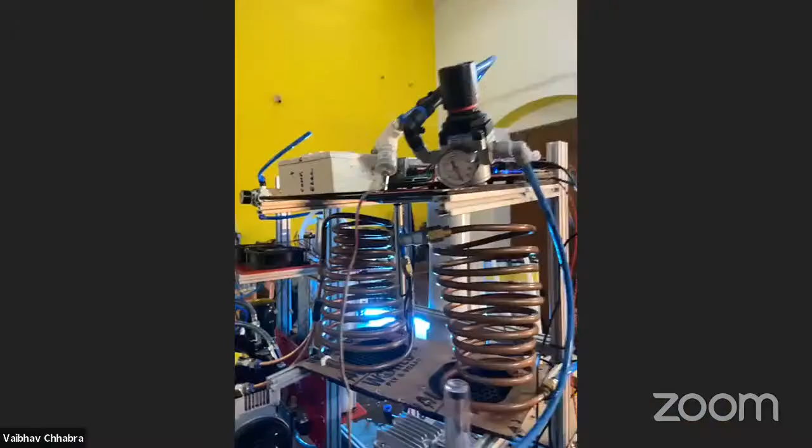And then from there, we get into a pressure regulator where we're able to regulate how much air is going in and out. And you have an oxygen sensor to measure out the exact amount of oxygen that you're getting out. So that's pretty much all of the system. Goes into the flow meter? Yes.

This part goes into the flow meter that you can see over here, where you can actually see exactly how much LPM is the flow. Obviously, right now the system is off. Anything that you want to add?

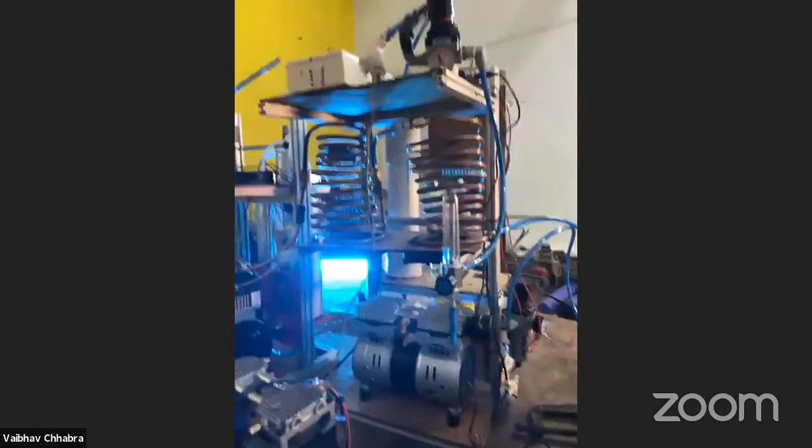Yeah, so the key to the whole system is the zeolite. Zeolites have the property where they adsorb certain gases and don't adsorb certain gases. And the adsorption is more of a physical process that requires some pressure. There are different versions of zeolite, but you can use things like sodium 13X, or you can use lithium X, for example.

When you pass air, which is roughly 80% nitrogen and 20% oxygen, through a chamber consisting of zeolite, the nitrogen sticks to the granules of the zeolite, whereas the oxygen passes through. And that's the basis of the whole pressure swing adsorption process. So you have zeolite, you pressurize it, and nitrogen sticks to the zeolite.

The oxygen passes through, you collect that oxygen as an outlet, and the nitrogen that is stuck in the zeolite, you push it back out through a reverse pressure. So that is more or less the heart of the pressure swing adsorption technique. It's not new, it's a fairly old technique, it's been around for quite a long time. So that's the heart of the whole system.

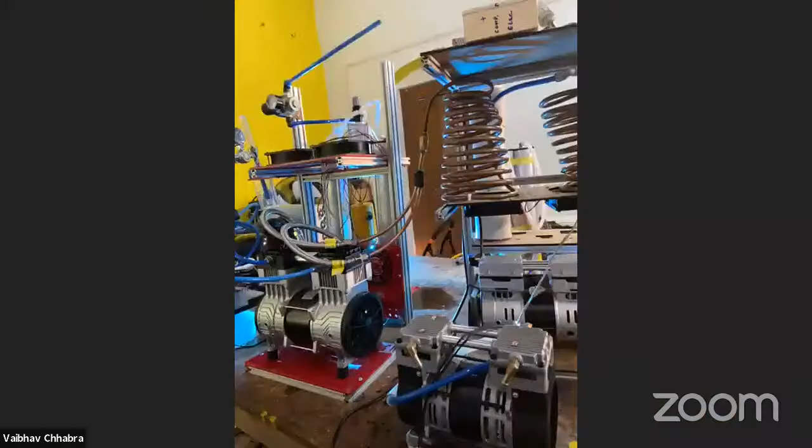And then there are a couple of other important things that you need to take care of. Things like the pressure at which you're inputting air to the system, how many liters per minute of air you're putting in, and your output directly depends on that. So the more input you have, the more output you get. Ambient temperature plays a big part in your system's performance. Ambient humidity is equally important.

So the last 45 days, these are the challenges that we've been tackling, trying to figure out what affects the system, what makes it better, what makes it worse, and so on. And based on that, we built a couple of prototypes. The first one that we had, I think Vaibhav can show you. You can talk about that.

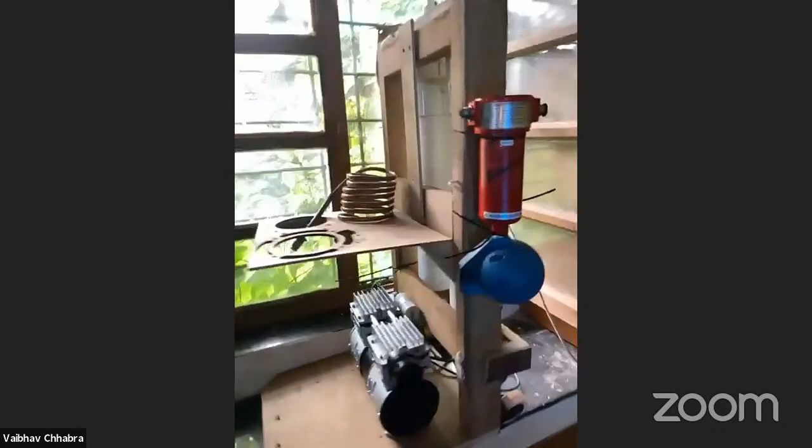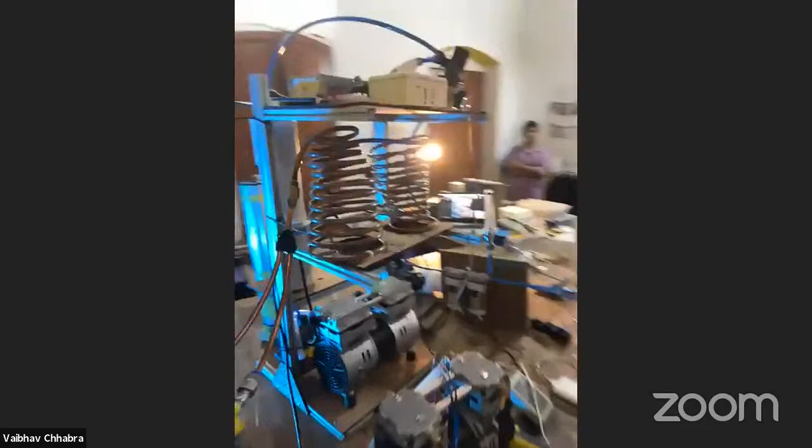And based on what we have learned with this system, there is version 3 that we have just finished. It still needs some wiring up and so on, but it's pretty much assembled at this moment. It just needs the electronics to go in, and we should be able to test it out within some time.

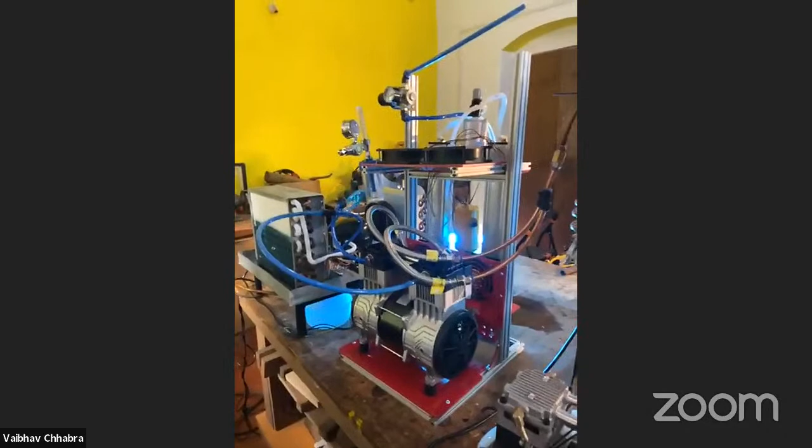Two of the biggest challenges we faced was how to get the required amount of oxygen at the high flow rate that was required. For COVID patients, you need anything up to 15 liters per minute at a concentration that is 93% plus or minus 2 or 3%. So nothing less than 90% is what your expectation is from the machine. And getting that is a bit tricky in many engineering ways.

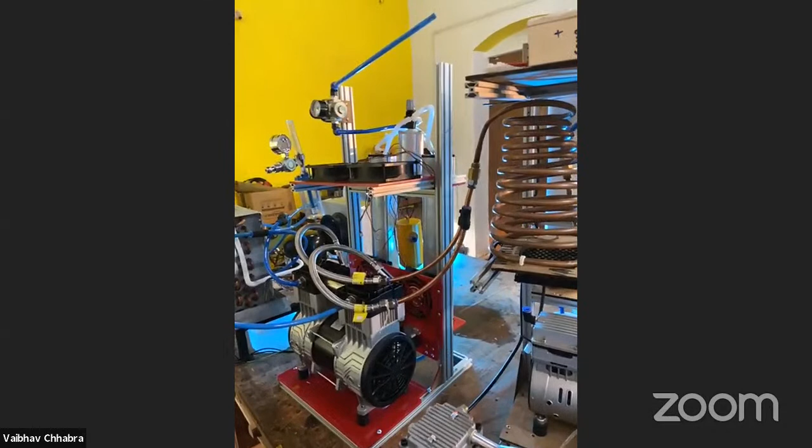So first off, when we did version 1, we were using a zeolite known as Sodium 13X. A lot of different labs have tried the same zeolite, and performance was a bit tricky in India with the high humidity we have. That's been a big killer for the zeolite. The trouble with humidity is zeolite absorbs moisture or water better than nitrogen. So after some time, the performance of the system really degrades quite a lot.

So most of the labs, some of the others who are here today will walk you through their trials about having worked with sodium 13X. But after about a month of trying out sodium, we came to the conclusion that we need a better zeolite. And our current choice is Lithium X. It's a much more efficient material. It is 3 times better than Sodium X, so we get better performance.

We can make a smaller system. It's more compact. And also some of the other elements that are required in the sodium system are not required in the lithium unit. So there is a kind of a cost balance in that as well. Want to show this? So yeah, quickly, this is what the current version 3 schematic looks like. It's quite simplified. There's really not a lot to it.

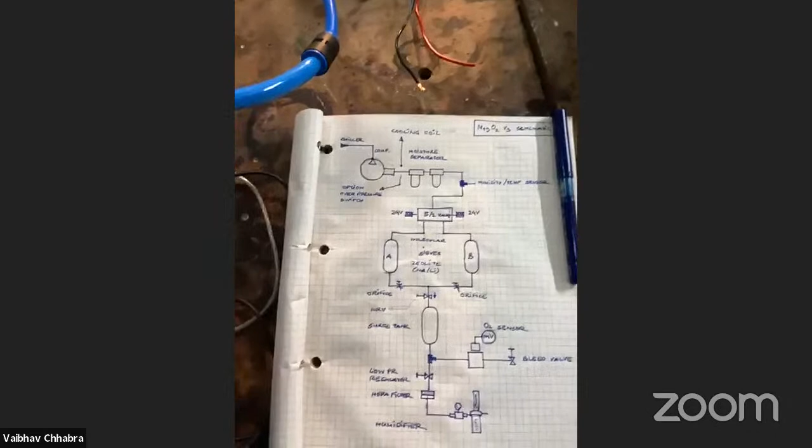So, pressurized sieve A. And while sieve A is being pressurized, sieve B is venting out to atmosphere whatever nitrogen it has collected. During that time, sieve A is collecting nitrogen into the zeolite, but allowing oxygen to pass through and come out through the orifices into the surge tank.

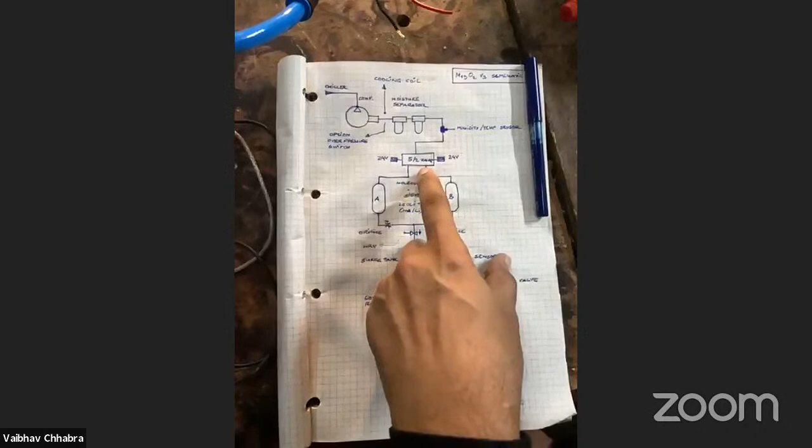And then after a certain amount of time, which is based on the timing cycle set in the electronics, you flip the thing over, and your sieve B starts charging with air, pushing oxygen out and holding nitrogen here. And sieve A starts releasing nitrogen that is captured in the previous cycle. And this cycle keeps going back and forth, swinging from sieve A to sieve B.

So the output of the 2 sieve tanks then goes through a valve into the surge tank, which is a buffer tank to even out the fluctuations in the output delivery. And from there is where you get your pure oxygen. We have a tap off to measure the oxygen through the sensor. We have a pressure regulator to set how much air pressure you get at the outlet.

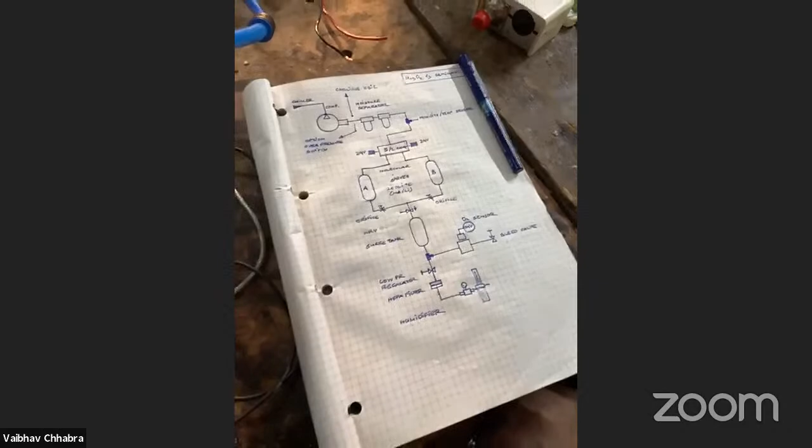You have a filter to make sure that the oxygen is filtered. And finally, there's a humidifier that makes sure that the oxygen output has some humidity, because you can't apply dry oxygen to patients, for example. Now let's see it in action. What we are doing next is turning on the compressor, so it's going to be a little loud, but here we go.

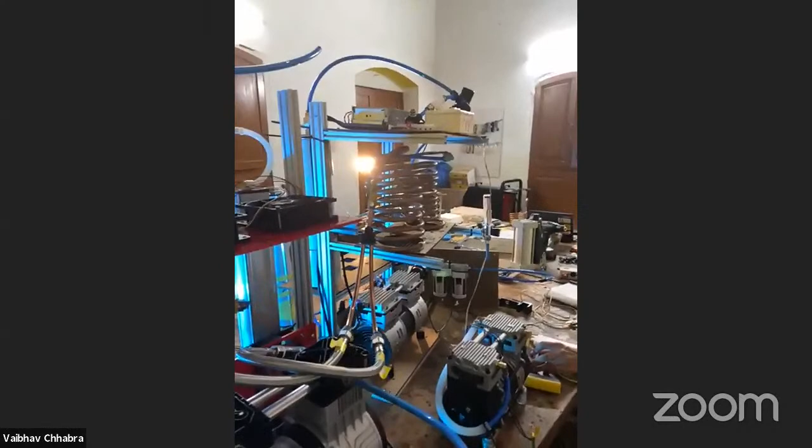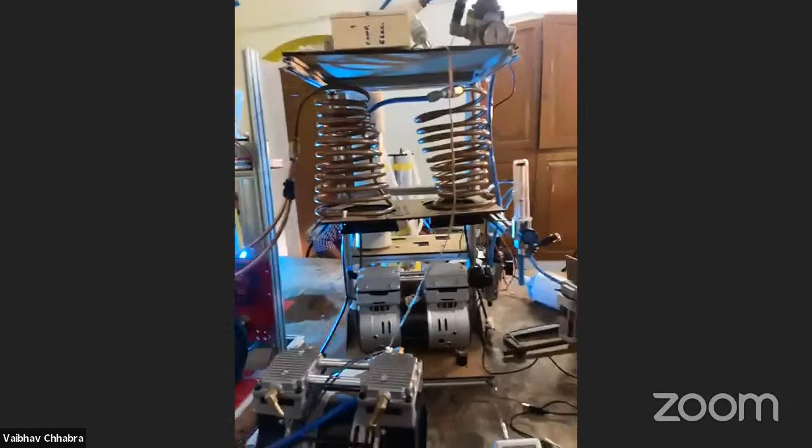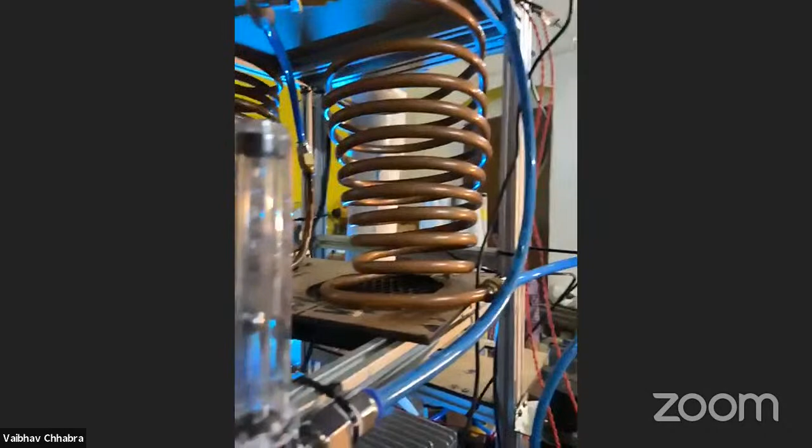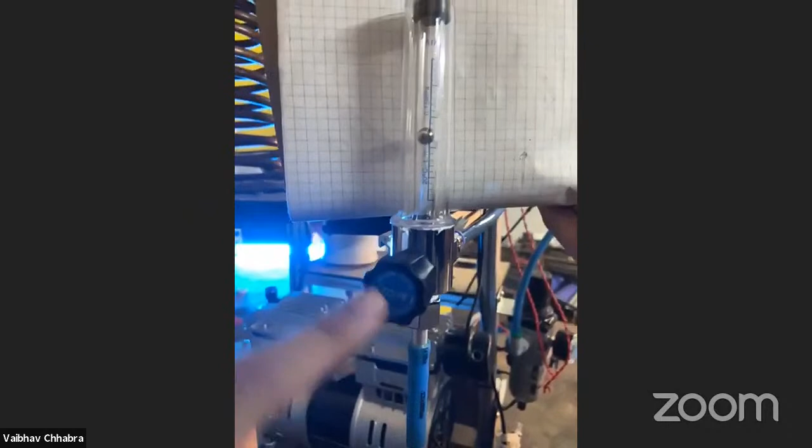At the flow, as you can see, rising. So currently, it's at about 15 LPM. 15 LPM over there. This is a float-based flow meter, so whatever you see, multiply that by 1.25. And then over here, what you see is the oxygen concentration, which gets ready. We will see it flying.

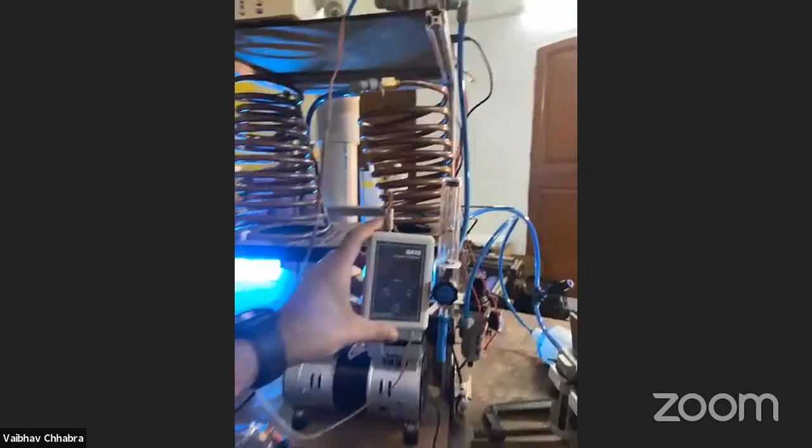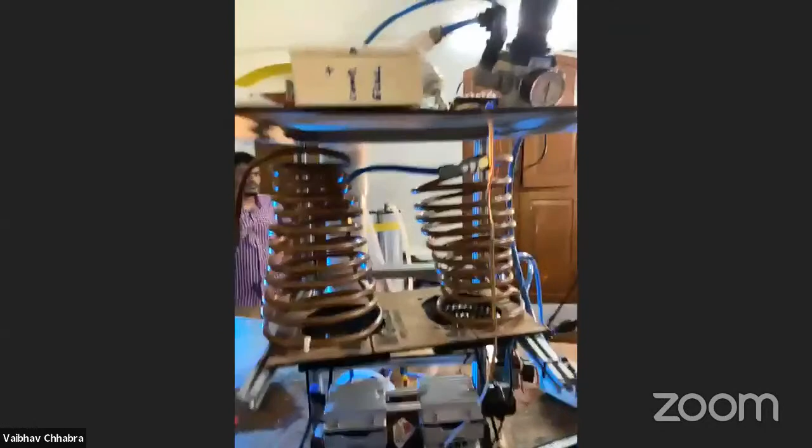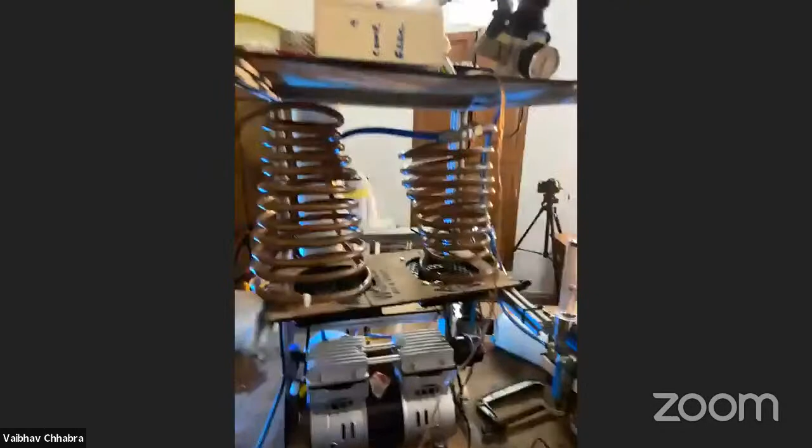Okay. Turning that off so we can speak a little bit more. First big problem is about the zeolite itself. Sodium versus lithium. So lithium absorbs about 22 ml per gram of nitrogen compared to sodium based, which only absorbs about 8.

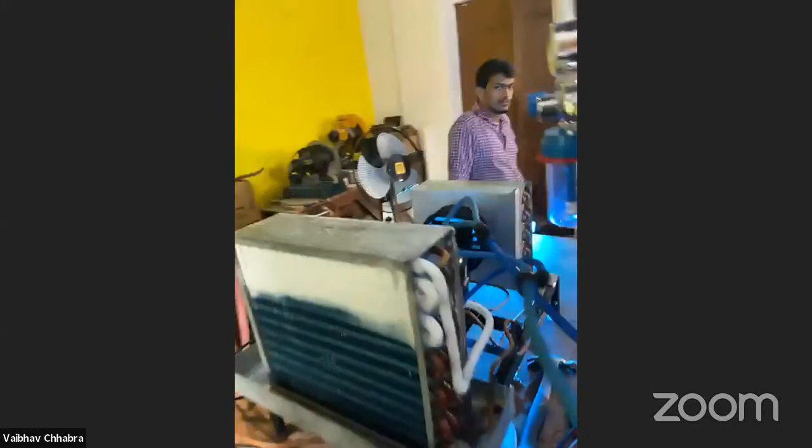Yeah. So one of the systems that we tried out to solve humidity was this one that we showed you. The next system that we're testing out that Gorbachev can talk a little bit more about is a chiller. So this over here is the chiller that we rigged up. So there's a compressor. That's the heat exchanger. And that's the chiller. So the output basically goes from here currently into our main system, directly into the big compressor, where the pipes can take it into our system.

Okay, I think that's pretty much it from our side. And now what we can do is let the other labs talk about their inputs.

Before we move ahead, I just want to talk about zeolite. I know Vaibhav showed you the zeolite box and everything. If you see the white granules, the fine particles, that is the size of zeolite you have to use. They are very small. If I can show you, this is the zeolite grain here. It is 0.7 mm. That is the fine zeolite granule that you need for generating oxygen.

There are 2 variants, as previously explained: sodium and lithium-based zeolite. With sodium, you need a larger volume for a particular liter per minute, and with lithium, you need a lower volume for a particular liter per minute. So lithium is the preferred one, but we went with sodium and we had results from the sodium zeolite. So I'll show you our current prototype.

So this is our first prototype. You can see sieve A over there, the surge tank in between, and then sieve B. And this is our desiccator, where we have activated alumina filled in, which does the job of reducing the humidity level in the air system. Making sure that your air is dry is very essential.

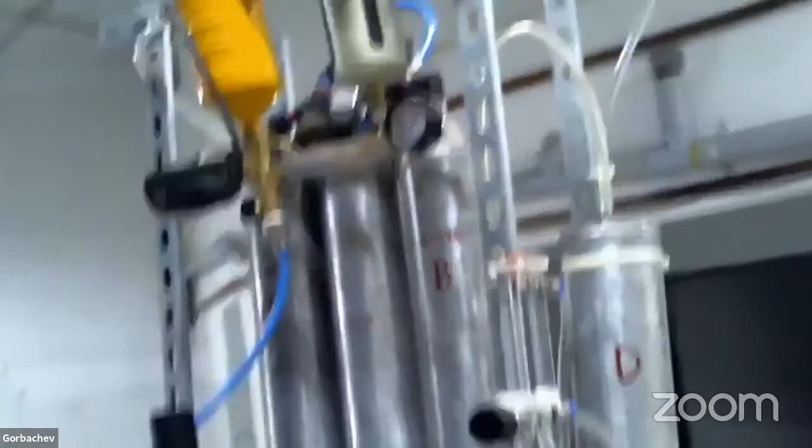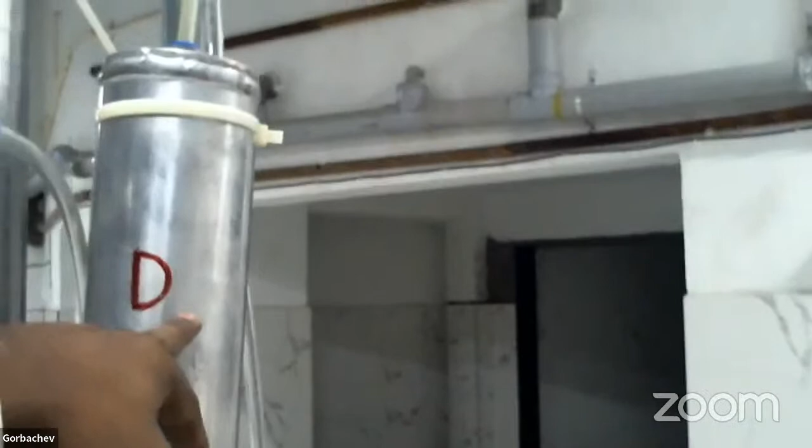If it is not, then instead of absorbing nitrogen, the sodium zeolite in these sieve beds will be absorbing water. That should not be happening. So you use a desiccant filled inside this chamber, which removes the moisture, and then the air is sent to the two sieve beds. Right now each has 1.5 kg of zeolite for around 12 to 14 liters per minute. If you want a higher liter per minute, you can increase the number of sieve beds or increase the

diameter of your chamber. This is the big radiator or condenser, whatever you want to call it, at the bottom there, which does the job of cooling the air coming out of the compressor. The air that comes out of the compressor is hot because of the piston head. So the water is kind of in a vapor state.

The condenser helps cool the vapor down into water form, so that it can be removed using a moisture separator. This is a moisture separator here. It has a solenoid valve, so once the moisture reaches a particular level, we can remove the moisture from the airline system. For medical air purposes, making sure the moisture is removed is very essential.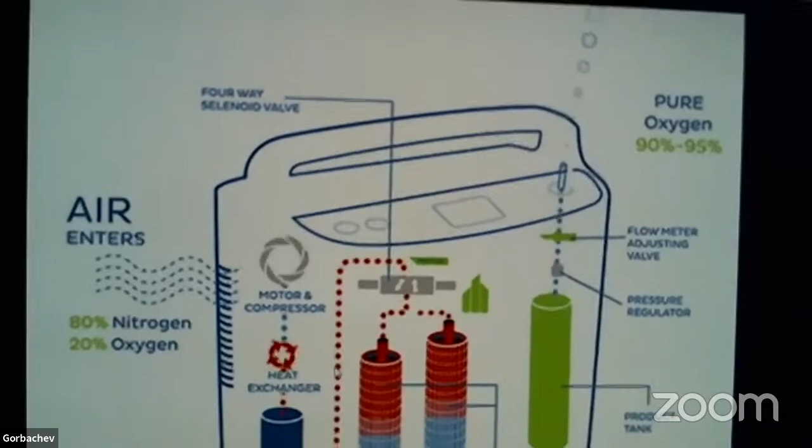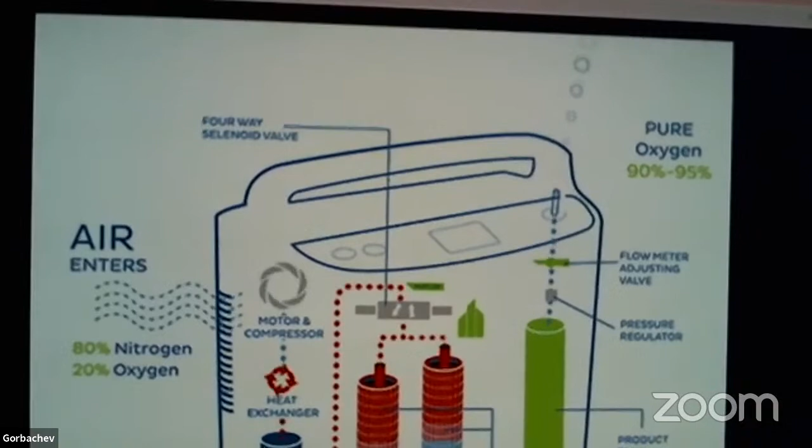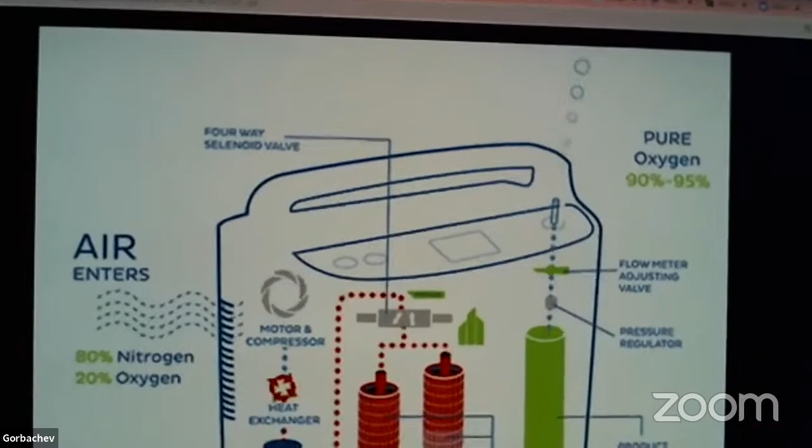But if you're in the coastal region, this will mostly fail, because the options to remove moisture or to further cool it down are not scaled or climatized to our Indian atmosphere. So that's what we are trying to fix. We know this part, how it works and everything else. What we are trying to fix is this heat exchanger part and optimizing it right now. So that is the challenge we have, and that's what we're working on.

I hope whatever I said made sense, and it helped you guys in whatever you want to do with it. Thank you. Thanks, Gorba.

I'm going to now call upon Vijay. So thank you so much, Gorba, for explaining how we were working on the sieves and the humidity issue.

There are multiple pieces of this concentrator that we all did not know about, but were able to really discover as to what is the real functionality of it, what needs to be broken down. There are a lot of questions coming up around certifications and all of that. We will be answering all of that at the end of the session. I do understand that everybody has curiosities about how we will get certified, et cetera.

But an interesting thing before Vijay goes into his presentation is that a lot of concentrators that are coming in are recreationally certified. So really, there's a question to ask overall when you're buying and donating these oxygen concentrators: what are we really doing?

But moving on, Vijay, like I mentioned earlier, is the CEO of Fracktal Works. He's the founder there. He's been part of the hardware ecosystem for a very long time. He's been building 3D printers in India for about 8 years now. And he was with us in Goa since the beginning of the restarting of the initiative. He spent 1 whole month almost with us, actually, before he went back to Bangalore.

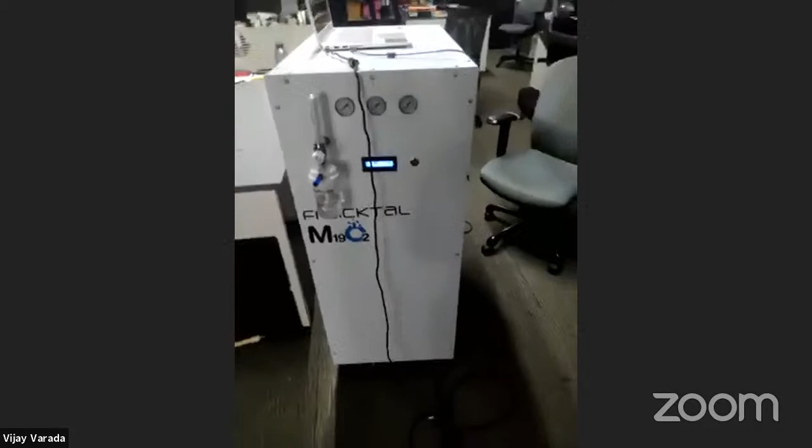So this is the oxygen concentrator that we've built. It's a little bigger, because this is based on the Sodium 13X. And because of that, everything had to be much larger than what the Maker Asylum team have shown. Let me see if I can switch to my front camera. Hold on. There you go. Much better. So right now I'm using it also as my table, just to show you the live demo afterwards.

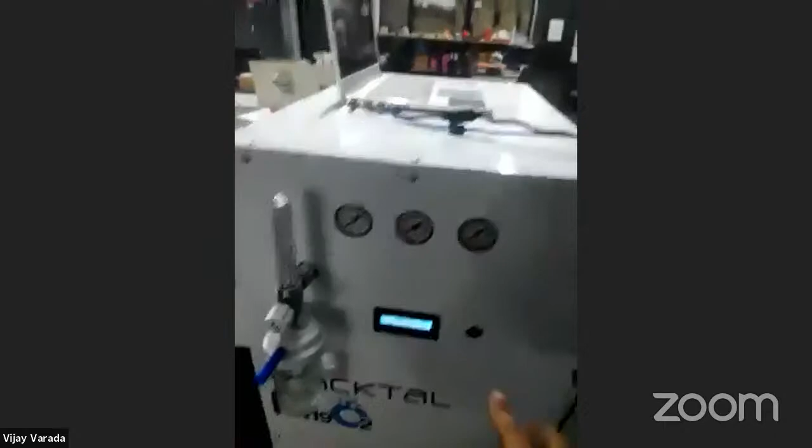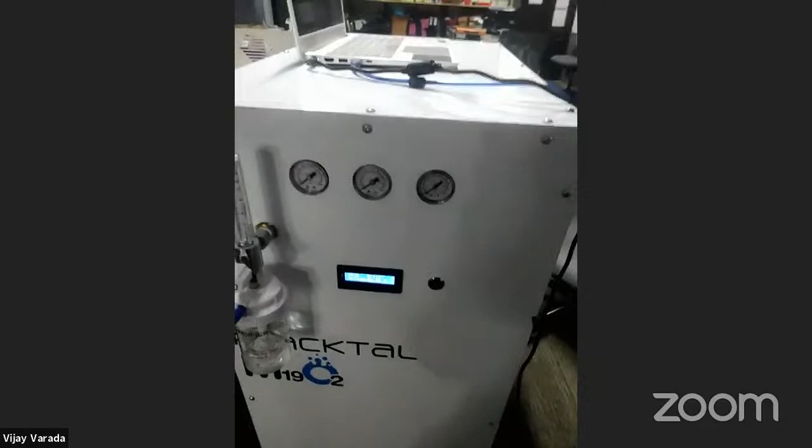So we have the display over here, which shows the oxygen percentage, all the critical pressures over here, and then we have the flow meter at the output. This button primarily starts the compressor. So you make sure that the electronics start before the compressor starts. I have the side open over here, so we have a 2.5 horsepower compressor, courtesy Maker Asylum for donating this for the time being.

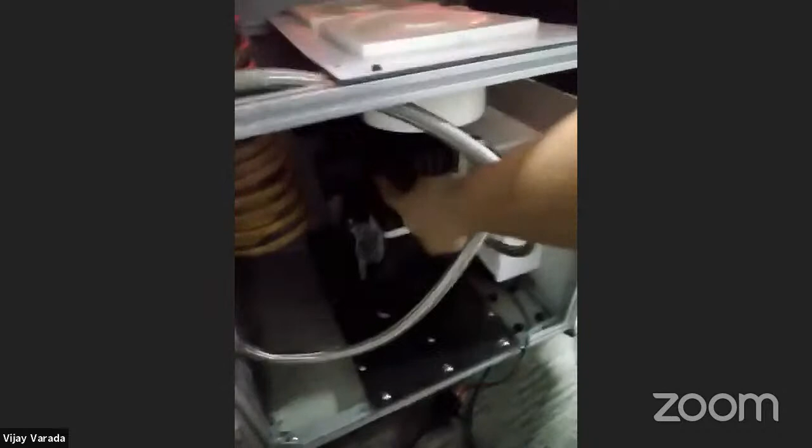This is what is required for getting about 15 to 20 liters per minute from a Sodium 13X system. Right now I'm using Sodium 13X, and like Anool had mentioned earlier, compared to lithium, it's 3 times less efficient than Lithium X. So to compensate for that, you had to have a much larger compressor.

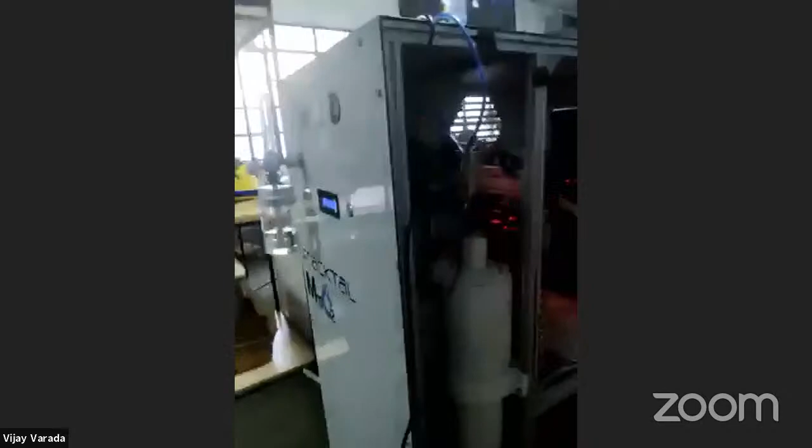And more or less, everybody's talked about the different parts. We have a much larger cooling coil. We have a moisture separator. More or less everything else is standard. We had to have all of these components on it to make sure that you get 15 liters per minute from a Sodium 13X system. So I'm going to turn it on now, and I will show you the output. Turning it on over here, it might increase in volume.

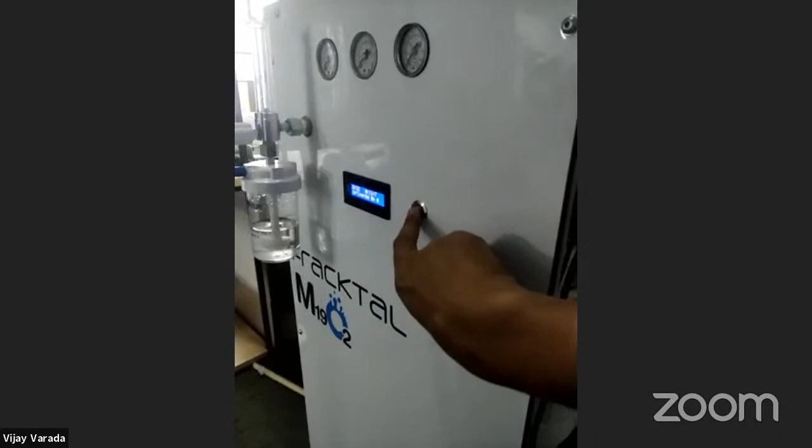So I'm going to switch over to my laptop now and show you LabVIEW, which we've been using to calibrate the timing parameters. Give me a minute. Hello, can you hear me? Okay, awesome. So the device is on right now. I'm going to share my screen. Could you let me share my screen so I can show them the LabVIEW display? You can now share your screen.

Okay, so a little backstory behind this. When we were at Maker Asylum, there were quite a lot of problems to deal with. We were dealing with a cyclone. We were dealing with power outages, in addition to figuring out the oxygen concentrator. And this was the first time we were making it, right? And there are a lot of things that change when you're changing your ambient temperature, the size of the zeolite, the kind of zeolite that you're using.

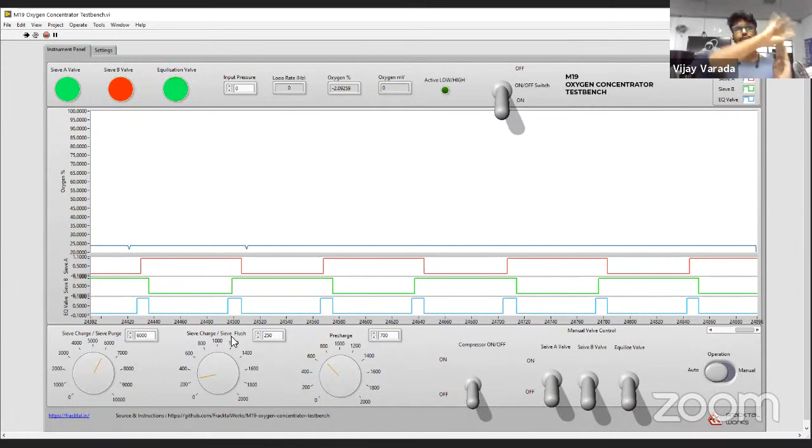So again, if you can see my screen, the three main timing parameters on an oxygen concentrator. You have your sieve charge and purge, where one sieve is generating oxygen and one is purging. You have your flush cycle, where all or most of the oxygen being generated from one is used to flush the other one and remove all the nitrogen. Then you have your pre-charge, where both the sieves are generating oxygen.

So these cycles are extremely critical to figure out and fine tune, because ultimately this is what gets your high level of oxygen purity, as well as makes sure that your zeolite lasts for a long time. Otherwise your zeolite gets saturated with nitrogen and it's very difficult to get started again.

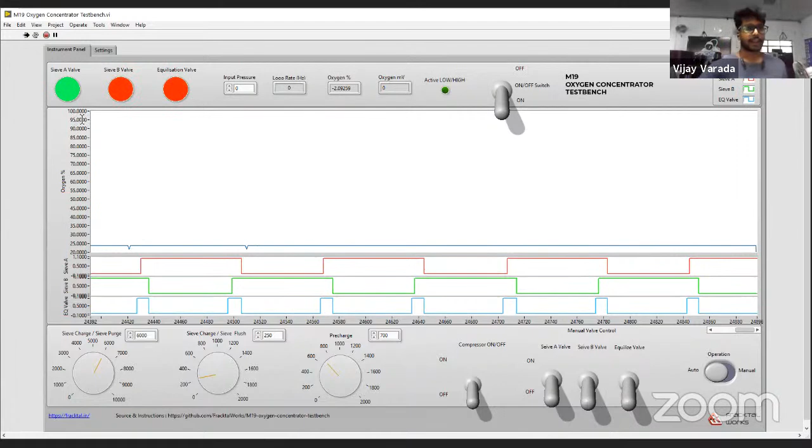So I will start up my system. I have it connected to the machine right now. I will turn it on. Okay.

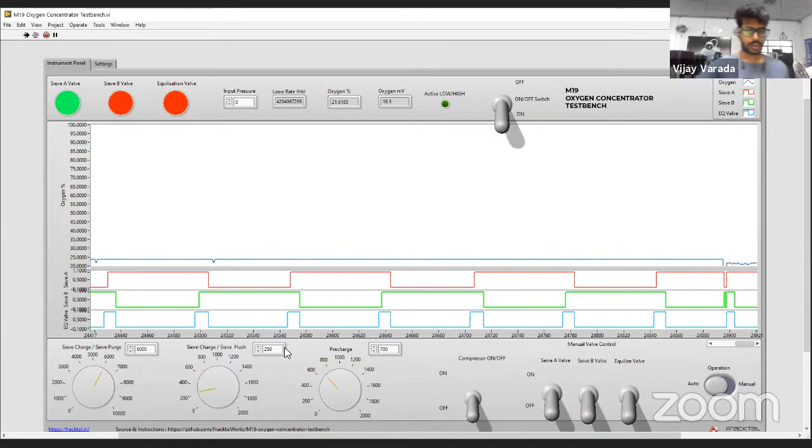Okay, awesome. So now basically the compressor is off, so it's showing me the oxygen value at ambient. All of this can be calibrated from the settings. What it's showing me is the timing cycles for my sieves A, B, and equalization, and I can change this on the fly over here, and it's giving me the oxygen value.

So I will turn on the machine now, and then you will see how the oxygen will start increasing. Slowly the oxygen is increasing over here. You can see right here. I'm also correspondingly showing the millivolt value.

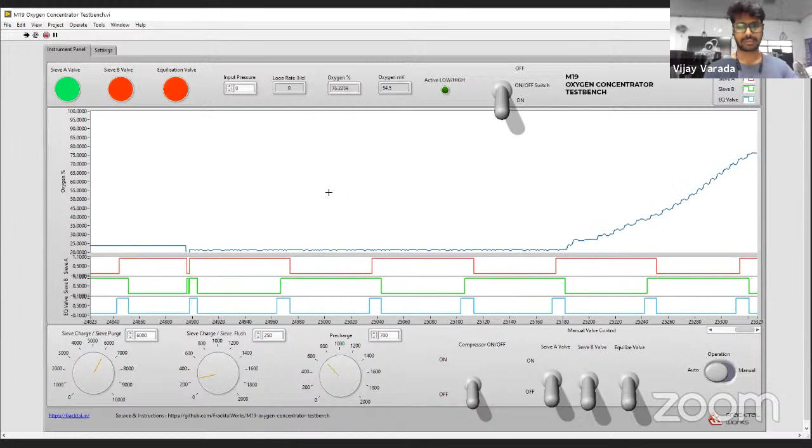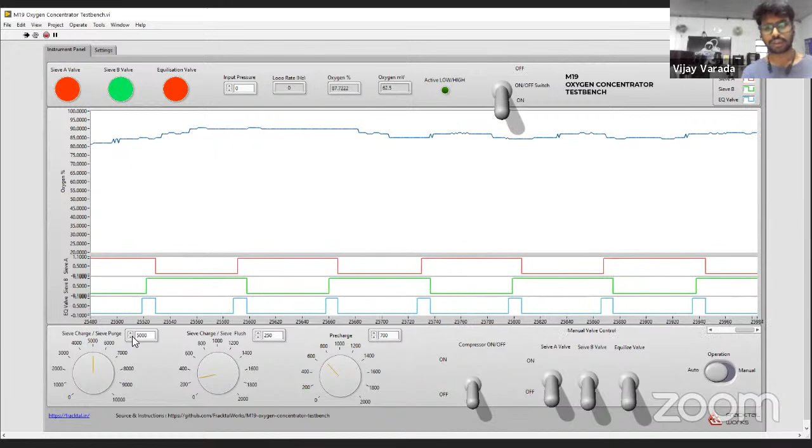This is what we use to calibrate the machine. By changing these timing parameters on the fly, say if I make this 3000, then again slowly the oxygen value goes up and down depending on these parameters. So that's how we've been working on calibrating these machines, fine tuning the operating parameters. Okay, fine, now I'll turn off the system.

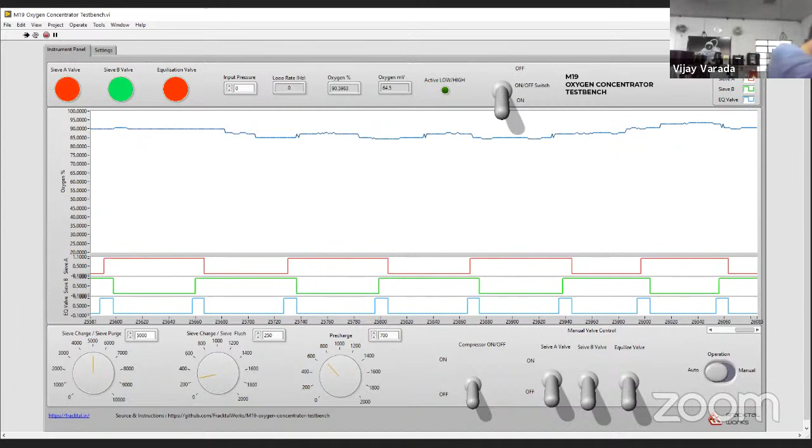So we have not only been able to tune our machine, but quite a lot of other makers have been able to use LabVIEW to fine tune the process parameters for their machines. So that's been really cool.

So yeah, that is the update from me, Vijay from Fractalworks. Hope you all are successful in building your own oxygen concentrators.

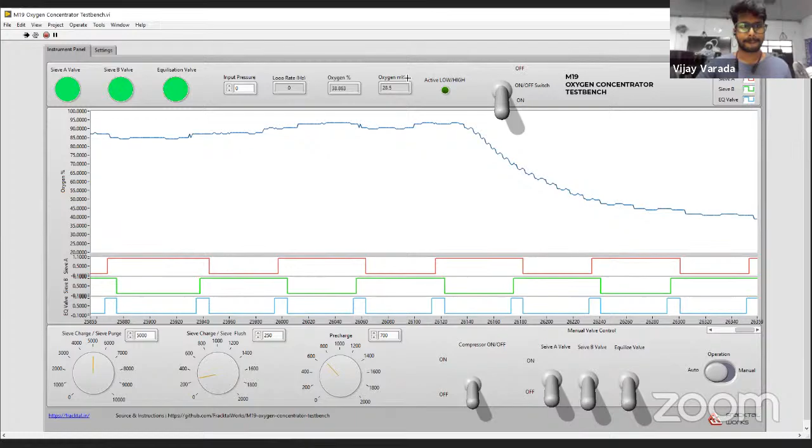Thank you. Thanks, Vijay. Could you also stop sharing your screen, maybe? Yeah, my bad. Sorry. All right. Thanks so much, Vijay. Sorry, one second, I'm just going to remove the spotlight.

Yeah, so I was trying to emphasize at this point that there are a couple of questions that I wanted to take before we go to the next session with Vivian and Mohammed. Gorba explained a little bit about the sieve. Some people are asking us why lithium versus sodium zeolite, and that's one of the questions that everyone's asking.

At least from what I understand, just to moderate this, lithium-based zeolite is more effective in absorbing the nitrogen in air, and you require lesser amounts of lithium zeolite for better efficiency. But it is very expensive, at least 3 to 4 times more expensive than sodium zeolite. Sodium zeolite, you will need more of it and it has lesser absorption capacity, so your system will be a little bit more bulky. With lithium, you're able to make a system which is a little more compact because you're using less of it. So they have pros and cons.

But zeolite in general, whether you use sodium or lithium, you will need to handle really well because of the humidity and the temperature in India, because it degrades pretty quickly if it's not handled well. So it's only from a perspective of the size of the end output that you need versus the cost benefit analysis between these two.

This board, we received it actually yesterday from the PCB manufacturer in China, and we assembled it ourselves, all the components and everything. And I will just run through the main components that we have incorporated. Okay, the board is based on the ESP32 module, which is over here. It's an SoC.

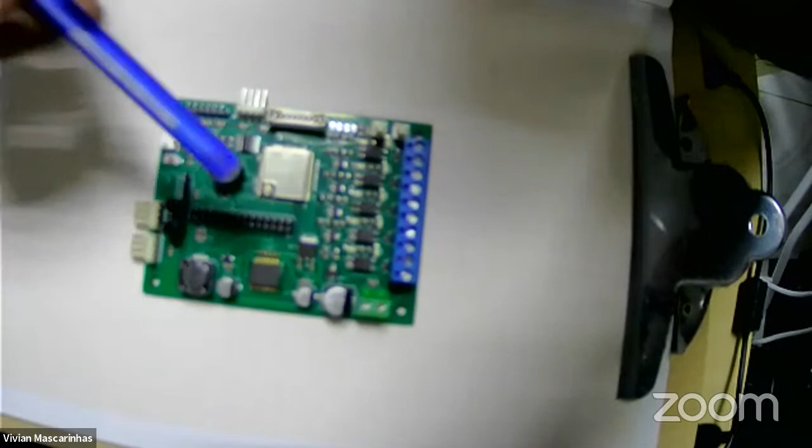So we have not taken the one with the built-in antenna. Since this unit would be mounted inside a case, an external antenna can be mounted, which can be used for web-based settings or upload of new firmware or anything.

Okay, this whole board has 5 solid-state relays. Now each of those relays is a 1 amp solid-state relay, and we have outputs over here: 3 for the solenoids, 1 for the fan, and 1 for the compressor. Now the compressor definitely has a higher current rating, so this output is basically to run a contactor to connect the compressor.

And over here we have 2 inputs. One input is for the on-off switch, and the other is for a high pressure break-off for the compressor. In case the pressure in the line is higher than what is set, we need to break it off so that it doesn't create a problem in the unit itself. So the contact from the valve can be connected over here, and then the whole compressor can be shut down.

The board works from 12 volts up to 24 volts. We have a buck converter over here, and we have a 3.3 volt regulator. Apart from that, what we have also included: this connector over here is for a 2.2-inch SPI display, and this input is for the oxygen sensor.

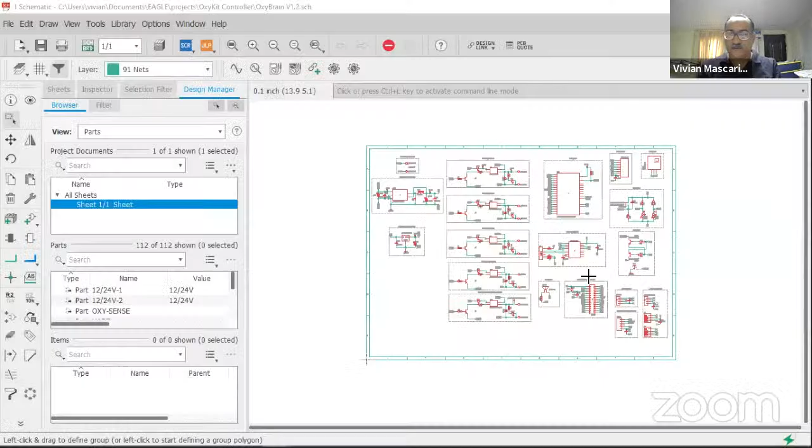Now, to actually do this whole board, as I told you, we designed the board over here. I'll just run through the board design. I'll share my screen. The whole design was done in Eagle Schematic, and that's the input power, the buck converter, and the 3.3 volt regulator. And each of the outputs has got 2 LEDs connected to it.

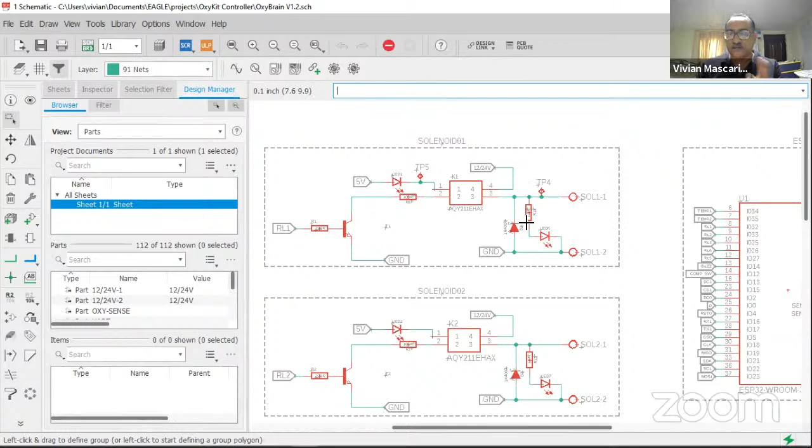Now these LEDs are connected in series to the SSR itself, so that in case the SSR is faulty, we will know. If the LED is not working, we will know that the SSR is faulty as well. Also, we have 1 LED across the output to ensure that the output is being powered correctly.

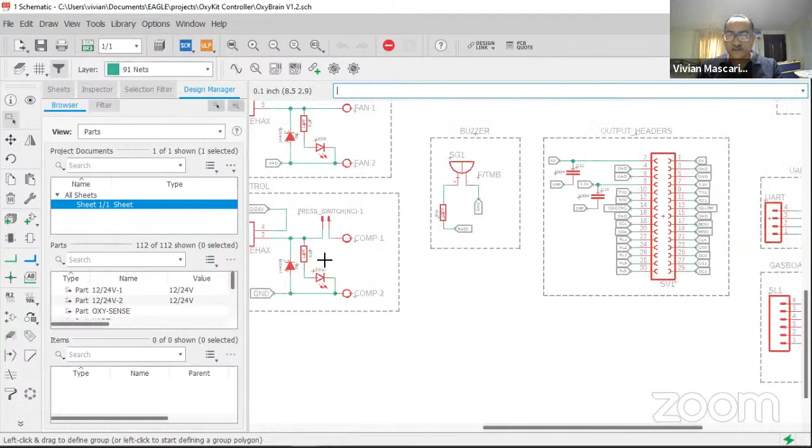This is for the 3 solenoids, and the pressure switch is connected directly across the output, so that in case it breaks, your compressor is directly switched off. It's basically hardwired. Then we have a buzzer on board. We have the outputs over here, all the outputs for the 30-pin header.

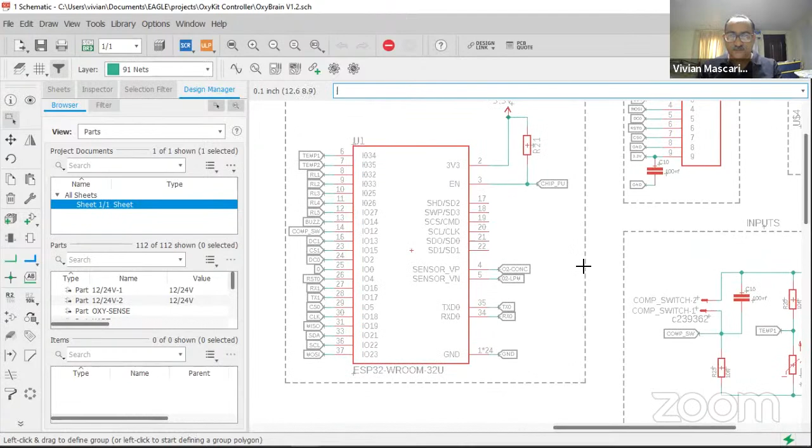And we are using the CH340C. And that's the ESP32 module. That's the connections for the 2.2-inch TFT SPI.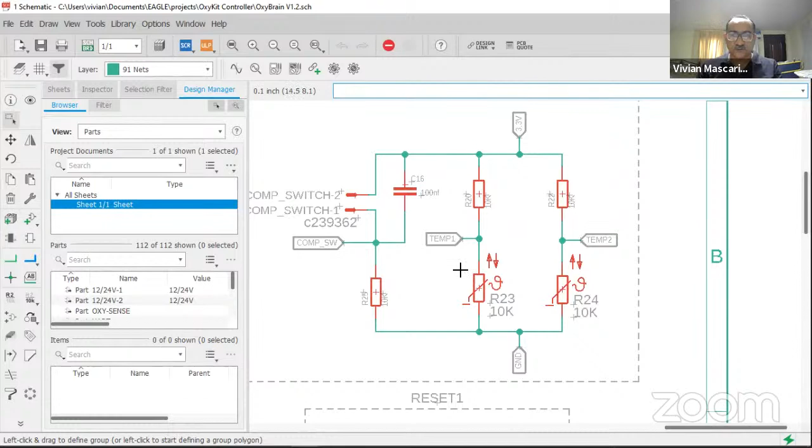Then you have the I2C, and I have also included 2 temperature sensors which can be wired in case you need to monitor the temperature of the air which is coming out of the compressor and all that. It's available. And that's for the on-off switch. So reset circuitry, and the inputs and outputs available on the bus.

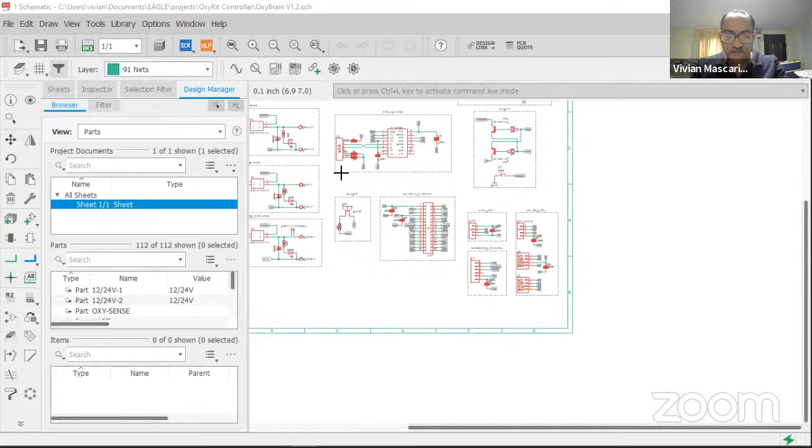So the board design, it's a 4-layer PCB. The size is 100 by 75. And we are still testing the board. At the moment, we have uploaded a Blink code, which was to test all the outputs. So I'm just going to connect the board so that... that's what we have done so far.

And apart from this, now we are working on the code itself. We have another member in our team, Mr. Mohammed Anas. He is working from Doha, Qatar. And Mohammed and I work in Dubai, and we coordinate, and we are doing the testing of the board and the code and any modifications to be done.

Whereas Anas is working on an RTOS-based code for the entire thing, so that the cycles and various tasks which are to be done by the system will be 100% right. We can make sure that it will be running correctly. So this code should be ready within this week, and we will be testing the board with that. And after this, whatever is the final one, the board will be shared in the group.

Thank you, Richa. Mohammed, would you like to add something? Mohammed, would you like to say something? Actually, Vivian mentioned everything in detail. That was beautiful.

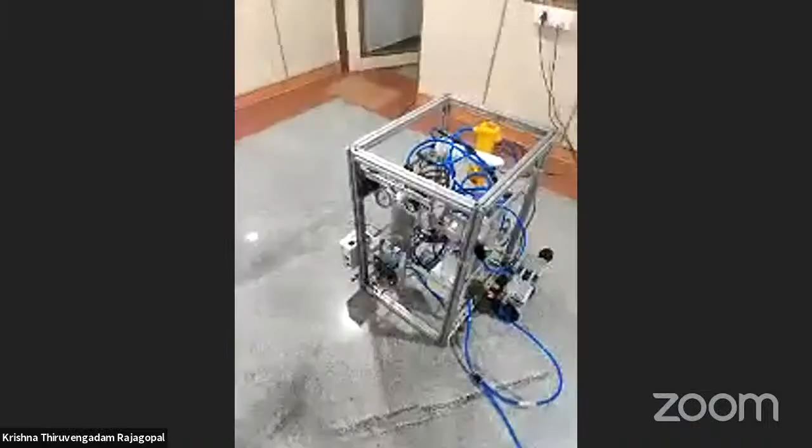So we are using 2 compressors. One is a compressor head, and one is a compressor with a tank. Most of our condensation happens in the tank, and we also developed some low-cost methods to remove moisture, because since Chennai is in a coastal region, we have issues with the ambient moisture being around 80% on average. So now let me share with you, just a minute, the journey that we had so far.

Sorry, Krishna, could you share your screen again? Okay, yeah, sure. It says screen sharing is disabled. Yeah, you can try now. Yeah, cool. Visible? Yes. Yeah, good.

Okay, so those who are into product development will know that it's not a very quick and easy road to take, right? Product development itself takes a long time. So a few learnings from the past. Over the past year, we've been developing some automated sterilizers for elevators since the first wave, and basically we had underestimated the time and efforts to build a hardware product from scratch. We initially thought it would take a few weeks, but it took around 8 months to implement it in hospitals and start making impact.

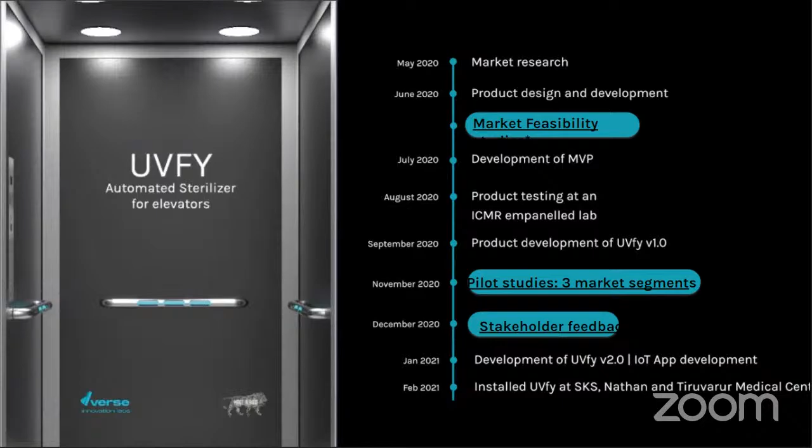And during the second wave, which was more dangerous, we were looking for ways to build oxygen concentrators, because as you know, we had a frantic need for oxygen supply, and many of our previous clients, hospitals, and apartment residents were approaching us and asking if we can build oxygen concentrators for them. We wanted to help, but we were also aware that we won't be able to do much alone, right? Because this time, added to the usual long product development cycle, oxygen concentrators seem to be even more complex with a life or death outcome, and also other challenges like lockdown and how do we source materials.

And taking forward the learnings from our previous experiences working as an active contributor in the open hardware domain, we wanted to join forces with the M19 Collective right from the start. We felt that if we did it all by ourselves, we would have failed to develop a fully functional product on time. So we realized that the only possible solution is an open innovation system, right?

So we joined the collective, and once the M19 O2 initiative was out in the social media handles, so many people were stepping in to help, either by sharing tools or resources, and they were willing to build. But at the same time, it was also very dangerous to do that, right? Because Chennai was like a hotspot. So we even made a UV sterilizer, a makeshift solution to ensure that everyone was safe and protected.

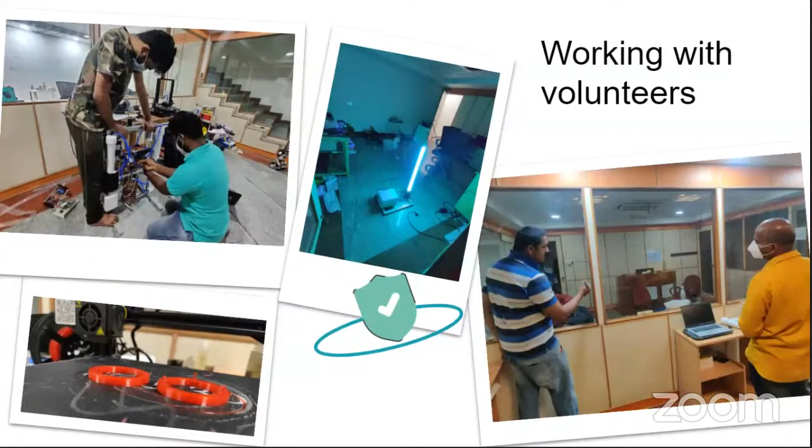And the best part of being part of the collective is that we were able to learn, design, and experiment at every stage. For example, we have these always-active groups, which were like a living encyclopedia. Anytime we are stuck, or any lab for that matter, you go there and you get answers instantly, like, okay, try this, try that.

And more importantly, like Richa mentioned, back then we had a very strict lockdown in Chennai. We couldn't really move out of our own streets. But because we were part of the movement, we had the credibility to reach out to the police department and source materials from the shops which were closed. That gave us a huge boost, because I've spoken to a few labs who were expressing challenges of how they were even going to source the materials in the first place. This was very helpful for us. And we were also financially supported by the funds that they raised at various stages of the prototyping.

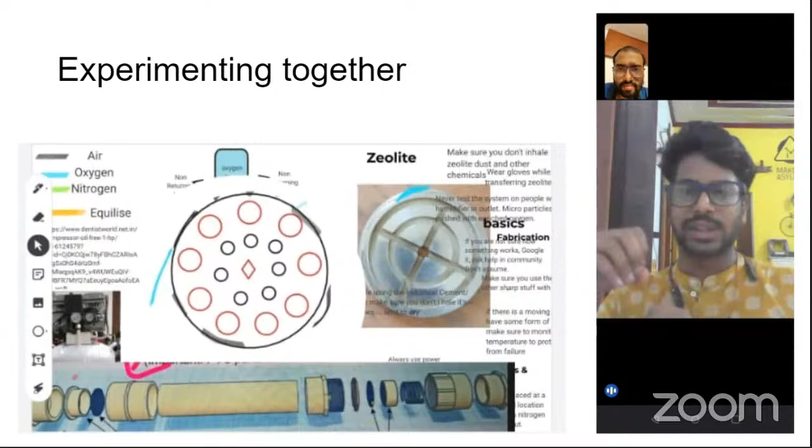And this is a Jamboard created by one of the members. Basically we wanted a platform where we can share the results, because every team was designing different canisters, different designs. So we wanted one benchmarking page where we can compare. That was super useful.

Initially we were using canisters which are used in water purification. We thought it makes sense, because we couldn't really source the original PVC canisters as mentioned in the OxyKit design. We used this, but then we had leaks, and at one point we had an explosion in the filter, and also the RO cap broke. So we had to change to aluminum canisters because we wanted to be safe in the first place.

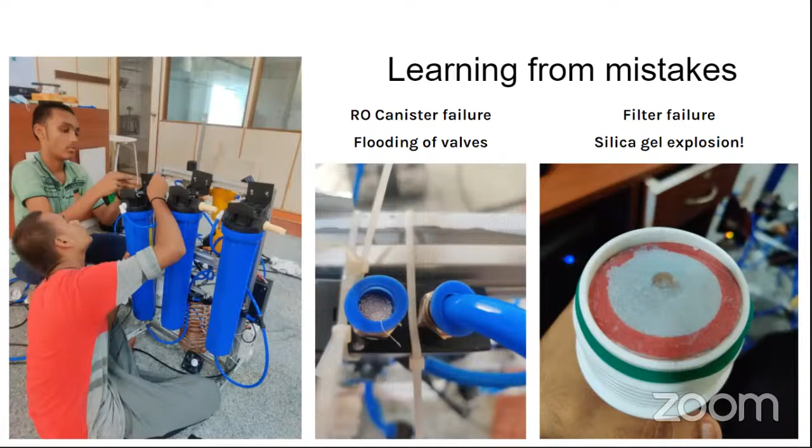Being in a coastal region, we had around 80% relative humidity, as I told you, and we were able to reduce it to 11.8% so far. As you can see here, we made a real-time monitoring web app. We were initially using LabVIEW software, but LabVIEW required a cable to be connected, and I had kept the OxyKit near my table, and when the explosion happened, it happened on my face. That was super dangerous. So I had to switch to a web app. One of the volunteers developed it for us in Chennai.

Even though the PCB was super cool and very convenient, we faced a lot of issues with very jugaad things like jumper cables, right? So then we made a hand-soldered controller, which is what we're using right now. Version 1 was very simple. We used simple 10-inch RO canisters, 2 of them, 4 of them, in series and parallel, different configurations. But we were not getting much output, around 45%.

We thought maybe it's because it's in series and it didn't have enough time to surge and purge. So we switched to 20-inch canisters in version 2, which was quite okay. We got around 60%, but there were still air leaks at the cap, which is at the outlet of oxygen. We tried to seal it with silicone gel, but it was not working because it was at high pressure. And because the RO canisters had plastic threading, under pressure we always had a fear of what will explode when. Then we had to switch to aluminum canisters that we fabricated in Chennai.

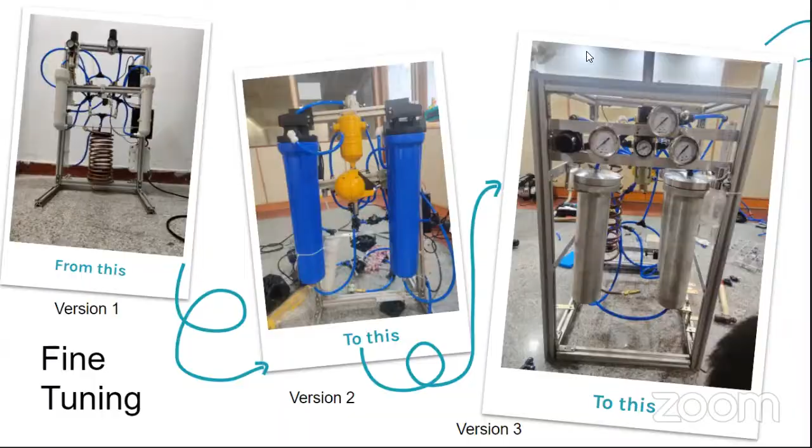All the labs, all the members of the collective, everyone's been working really hard for the last couple of weeks, and it's been almost 2 months now that we've been doing extremely amazing work across the board to really get things in action, and we're really excited to have everyone be part of this. It's been a very beautiful journey for us to learn from everyone, and vice versa, I'm guessing. So there are a few questions on the chat which I wanted to take up, starting from the bottom.

So someone's asking us, is it medical grade or just a hobby project? I want to answer that before anyone else comments. Putul, if you think this is a hobby-based project, we all have working businesses, literally all of us who are part of the collective. All of us have day jobs. We're not doing this for a hobby, but more from a perspective of really bringing open innovation to medical equipment as well.

Because at the moment, when you think about medical grade equipment, there's a lot of work that large companies do. There's a lot of capex that needs to be put into the whole system. When you're not sharing knowledge, at the end of the day, access becomes restrictive. So the idea of the collective and the initiative is to create an open innovation system so that we can all work collaboratively to bring down costs, innovate better, faster, cheaper, and in a more agile manner. That's pretty much what we are trying to do here.

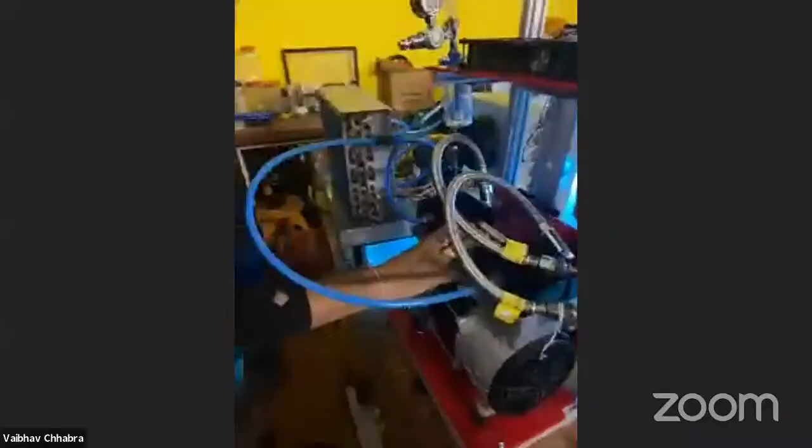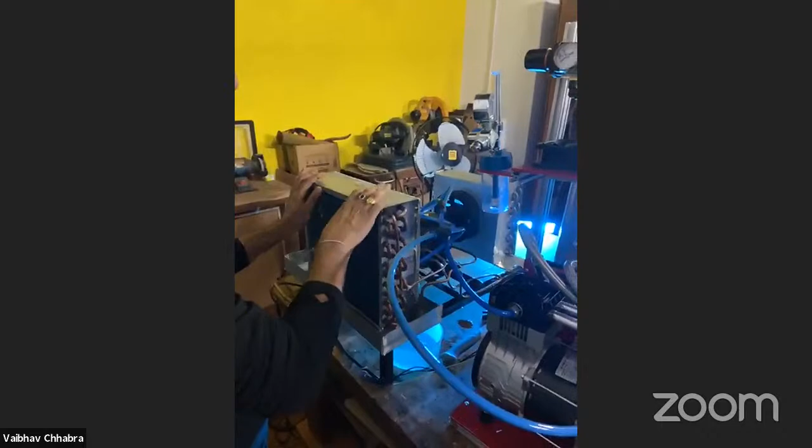Okay, so here we are. And what you can see over here is, this one is a 1.8 kilowatt, 2.5 horsepower compressor. We've got 2 cooling fans here and 2 at the back. These are high flow capacity. There's another 2 here at the bottom. Plus, we will eventually hook up a chiller system, which will actually pump cold air into the heads of the compressor. So we have noticed some better performance with that.

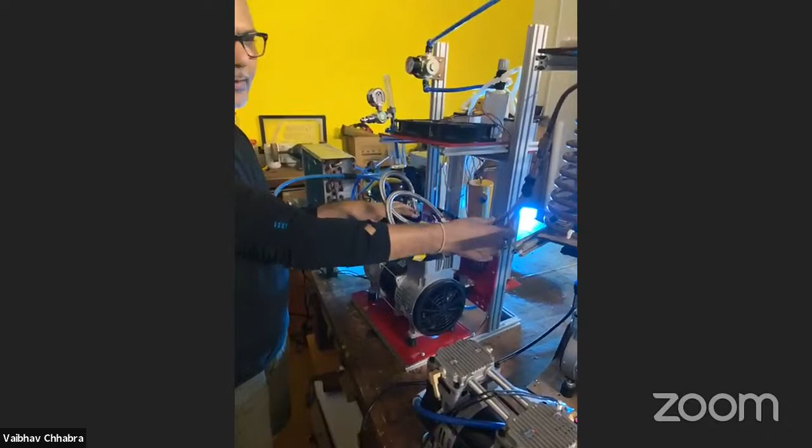The compressor heats up a bit less. It runs much cooler. The tubes don't get heated up and so on. So I think there is some merit to that approach. Right now, it's still work in progress. But yeah, using a chiller and using cooling fans is how we're going to tackle the temperature problem.

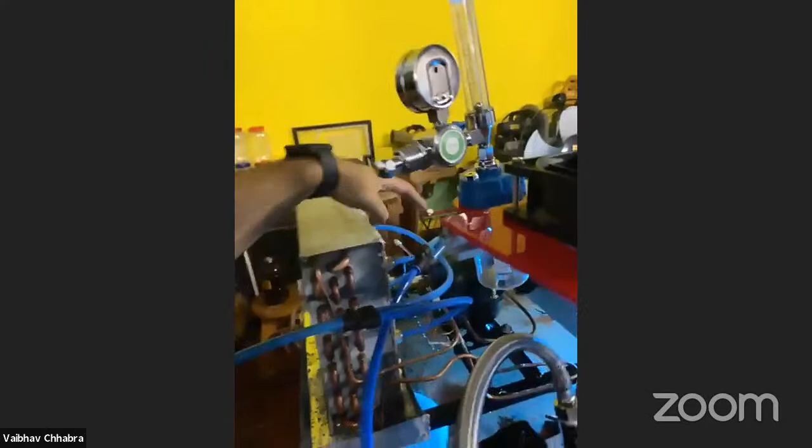Yeah, there's a significant drop in the temperature of the air coming out of the compressor. When you chill the air before, it literally goes down at least 20 degrees. And also, obviously, it takes off all the humidity. And that's what we're doing over here with this unit. Ambient air is going in, getting condensed. All the water pretty much falls down. And we take the air from the back into our system. Yeah. It's a huge issue for sure.